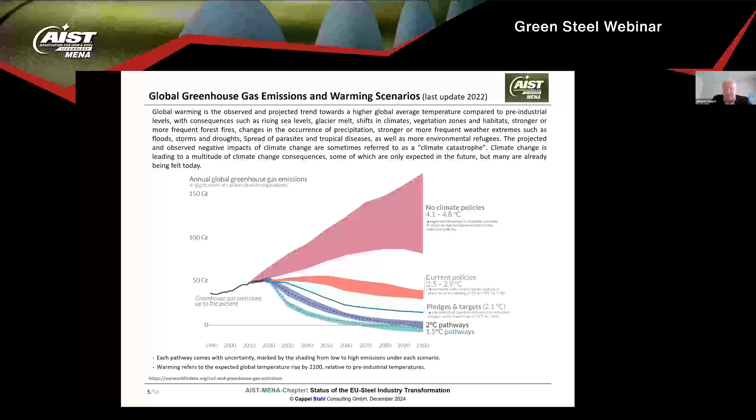We are facing... Jürgen, can you switch on your camera? It will be better if you are a speaker. No, it's okay, but the problem is I cannot switch on my camera. Can you see me? No, we don't see you. Yeah, but you have stopped, Karim. Try again. I mean, if it's working, if not, then okay, disregard my question. No, I'm sorry. I'm now in the presentation mode. So first, okay, let's go ahead like this. Huh? Okay, now I can. Okay, good. Okay now? Thank you.

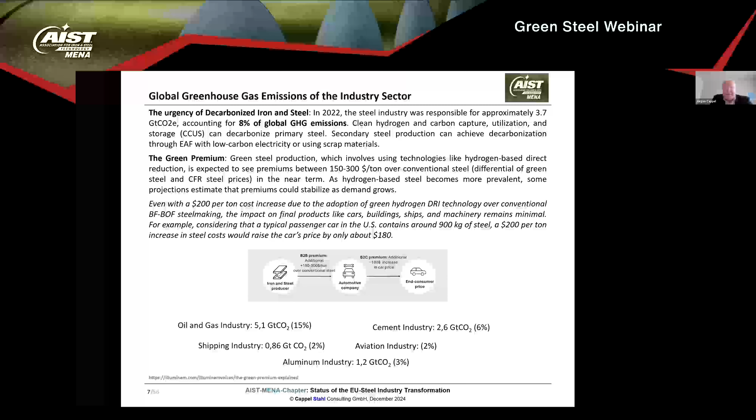Yes, please go ahead. Okay, so most of you know about this situation. If we do nothing, then we will face a global temperature increase of almost 5 degrees. With the current policies implemented, we will face a temperature increase by 3 degrees, but our aim is to reduce it to 1.5, and we have introduced pathways to reach it. If we will reach it, we will see after the timeline has passed.

So why is the steel industry in the focus? The steel industry is in the focus because it contributes roughly 8% to the total CO2 emissions. That seems to be very small, but at the end of the day, the chance here is that a huge amount of emissions can be cut by focusing not on a general measure, but on singular hotspots, which can be transformed for lower carbon emission. Why is the steel industry in the focus? Because the steel industry has the biggest share amongst all the other heavy industries, and that's why they started here.

Okay, let's look into the legislation. The whole topic started with the climate change Conferences of the Parties, or COPs, in 1992, where for the first time the link was made between global warming and the CO2 content in the atmosphere. It lasted until December 1997 to sign the first agreement, called the Kyoto Protocol, to reduce global emissions. And in 2015 in Paris, so after 23 years, we had the first agreement to reduce global warming down to 1.5 degrees centigrade in total.

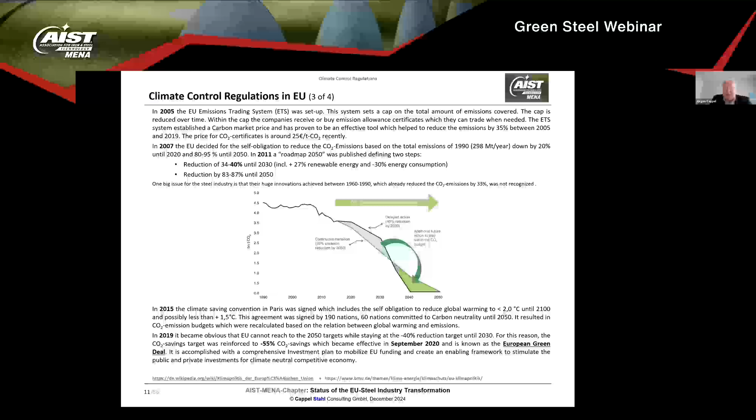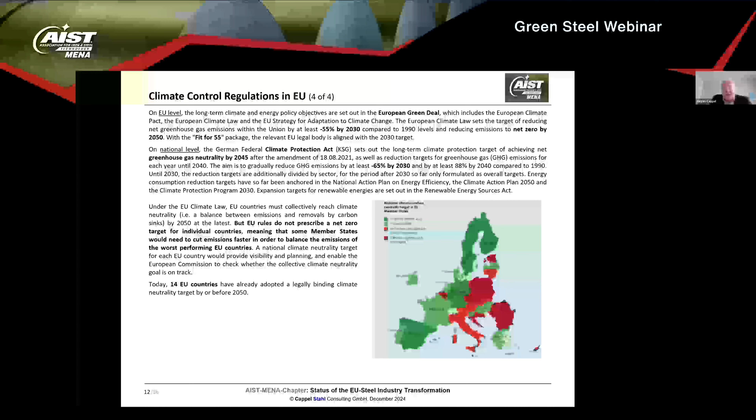Anyway, in Europe, already in 2005, the activities started to reduce emissions in general, and it became EU law in the meantime. And you can see here the path of the reduction. You see the historical reduction shown in the dark curve, and then you see the predictions.

And basically, the conclusion is that the EU has committed to reduce their emissions by 55% until 2030, and to become carbon neutral in 2050. And this EU law was then transferred to the countries. And here in the map, you can see that not all countries so far have contributed, but a lot of countries have converted these EU laws into national laws.

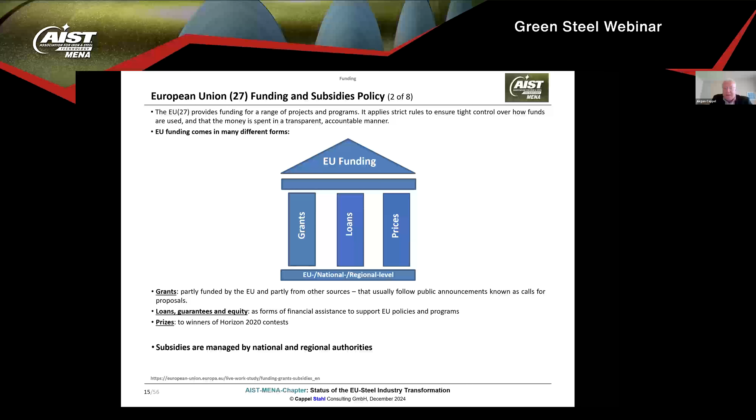And in Germany, the target is now to become carbon neutral even earlier, already in 2045. And the reduction in the first phase should, let's say, already be at minus 65% in 2030. One point has to be mentioned. Carbon neutrality or zero carbon is requested from the EU, but it's not requested from the countries. So this is a big difference. And of course, this is causing some discussion, but we will come back to that later on.

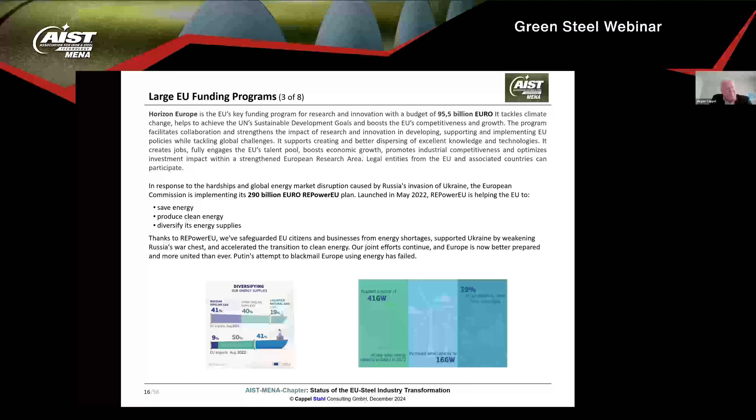Let's look at financing, because all transformations require the implementation of new technologies. New technologies require CapEx, and the CapEx must be financed from somewhere. And the CapEx amount for the first transformation was already estimated by business consultants and other people. And the first round, which will only be, let's say, maximum 40% of the transformation, will already cost 30 billion euros direct investment. So the question was how to raise this money. And this can only be possible by providing funds.

In the European Union, there are several pillars that can provide funds. One is grants, number two is loans, and number three is prizes. And all these different pillars are applied to provide, on the one hand, the CapEx for the technology transformation, but also green infrastructure, because it is not only necessary to implement new technologies to produce green steel, you also need green power, and you also need green hydrogen for the reduction. So all these things are funded with multi-billion euro budgets from the European Union to make things move. And here you can see an overview of the spend in different projects.

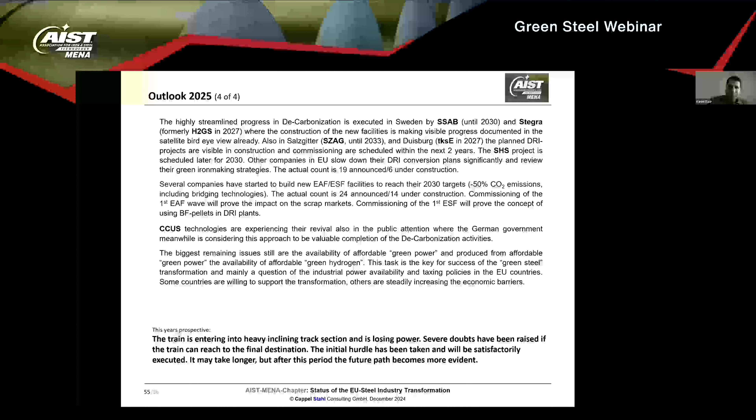And this is all raising doubts, and it seems that this train of the transformation, which started to move, is now running into a heavy inclining section and is losing power. In my opinion, the first round of investments, which are already confirmed, will be done. But what happens with the second round and the full transformation, today we definitely don't know.

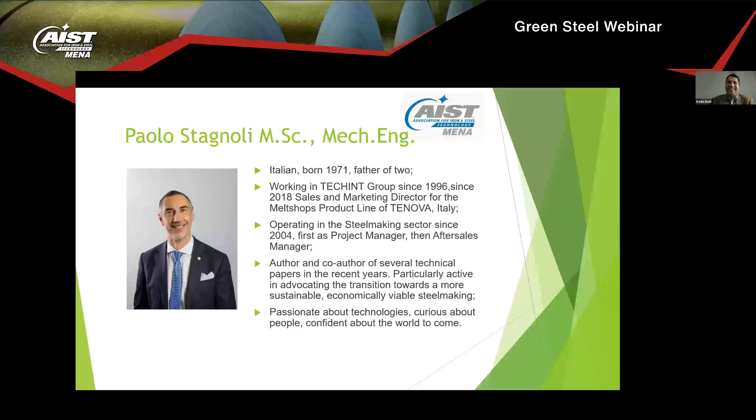We have with us now Paolo Stagnoli. Paolo is Italian by birth. He has been working for Techint Group since 1996, and starting in 2018 he became the sales and marketing director for the melt shops of Tenova. He operated in the steelmaking sector since 2004 as a project manager and after-sales manager. He's an author and co-author of several technical papers, mainly advocating the transition towards more sustainable, economically viable steelmaking. He's passionate about technologies, curious about people, confident about the world to come.

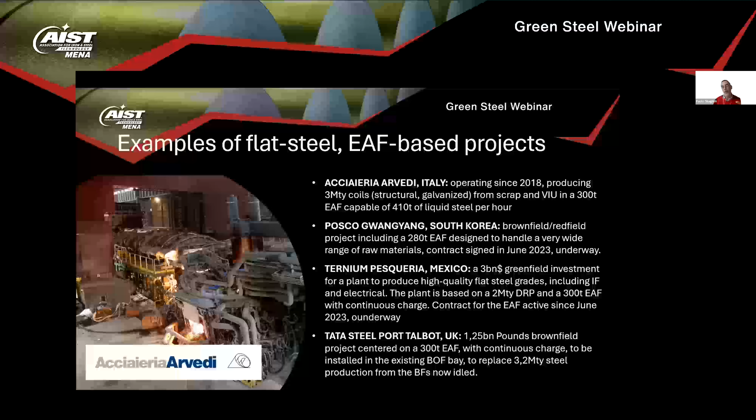I avoided most of the commercial references here, but I can just talk about what I know about, which is: we started demonstrating that electrical furnaces for flat steel were possible with Arvedi. Arvedi is producing comparatively simple grades, but based on that experience, we had several contracts ensuing. The last signed contract is Tata Steel Port Talbot. I can talk about that because it was in all the newspapers.

The trend of very large, very productive furnaces is continuing. We have several other projects ongoing with customers urging us to produce even more productive plants. Arvedi is producing more than 400 tons of liquid steel per hour. In England, provided that everything goes according to plan, we go for 430. And there are other Eastern players which are asking for even more. So the trend is consolidated.

The trend in Europe seems to be based mostly on the obsolescence of the productive assets. When the time for the relining of an old blast furnace comes near, the steelmaker has to take a decision. Most steelmakers facing this decision in Europe are deciding to kill the blast furnace and go for something else. Then the next decision is what to do and to what extent to push the integration upstream, because every producer of high quality steel grades knows that it's impossible to produce high quality steel grades with scrap alone.

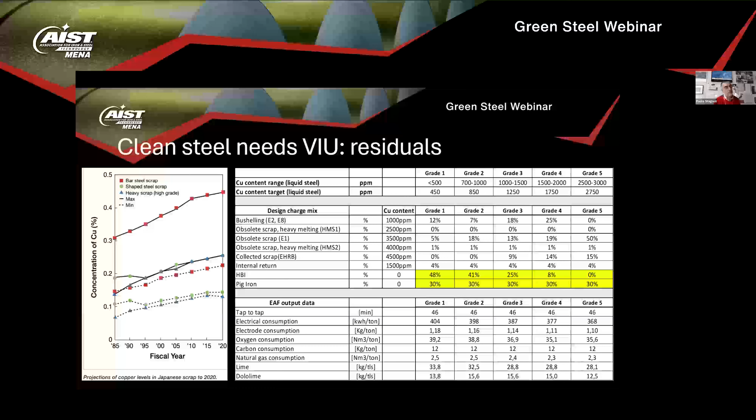So you see that we are studying possible electrolytic processes to remove the copper from the liquid steel. We think that the scalability of those processes, which work just fine on a lab scale, will come 10 years from now. As of now, if you want to produce clean steel: this study on the right was done for an Italian steelmaker willing to produce rails. For some grades, they needed to reduce the copper content to less than 500 ppm.

And you see that the only possibility with the scrap grades available on the Italian market was to use almost 80% virgin iron units. Also our cousins in Ternium, for the Pesquería project, on average will be using 60 to 70% virgin iron units coming from hot DRI to achieve the quality of liquid steel they need to satisfy the requirements of the users. Also Arvedi, even though they don't produce interstitial free nor electric steel, use a significant quantity of HBI and other virgin iron units to close the balance with an acceptable content of copper and tramp elements.

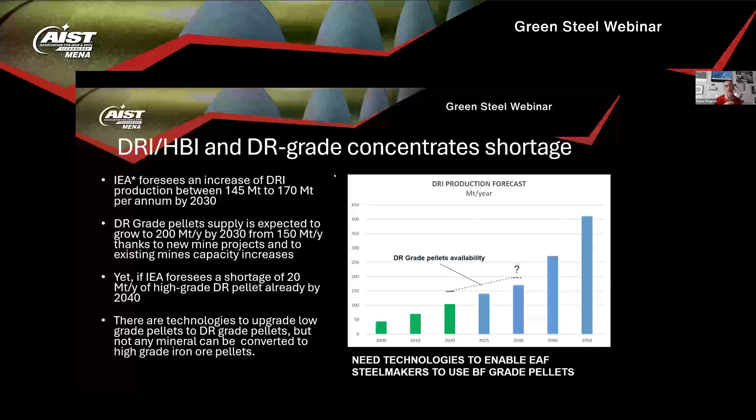But there are several factors pointing to the fact that this is going to be difficult in Europe. First of all, cost of the natural gas: running a plant, waiting for the green hydrogen to come, and hoping to have operating expenditures low enough to stay on the market is now kind of difficult. And there are also other issues, like Europe has no reserves of iron ore except in Sweden, very good reserves. And then there is the topic which was mentioned also by Dr. Kappel, of the availability of high quality iron ore.

Another evidence pointing to some issues with the future supplies of DRI and pre-reduced materials is that the market of DRI nowadays is in the range of 100 million tons, 120 million tons of DRI produced. Most of those tons are produced and consumed within the producing country, but we are trying to compare a market worth some 100, 200 million tons of DRI with the competing market of the blast furnaces, which consumes 1.5 billion tons of raw materials, if not more, 1.7, I would rather say. So many issues are pointing towards a lack of available technologies.

Coming to us, the producers of steelmaking plants, we can get to the quality desired. Several customers already, as I was showing to you, have decided to go for an electric furnace because we managed to convince them that under certain conditions they would have been able to produce the quality of product they want.

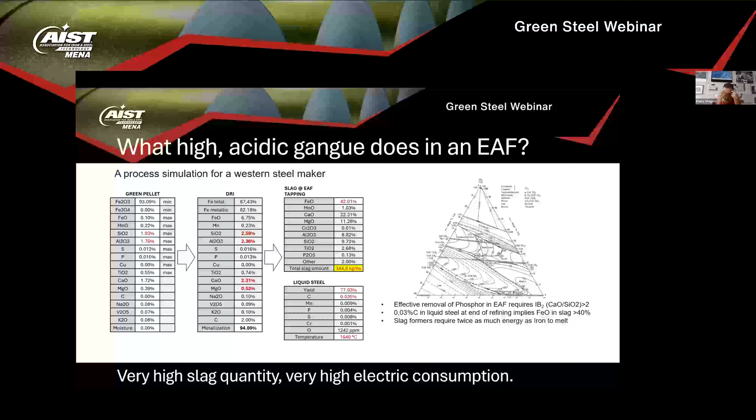And then there is a common misconception that electric furnaces cannot deal with BF grade material. Of course they can. Electric furnaces can melt pretty much everything. The real point is if one thinks to charge 100% blast furnace grade pellets, which have high gangue and acidic gangue at that, into an electric furnace, closing the process in a way like the one depicted in this graph, which points to the production of flat steel. So you see that in the liquid steel, the carbon content is 0.035, and so on. Tapping temperature is also consistent with flat steel production. One ends up with a huge quantity of slag. This is by operating the EAF in the normal way, okay?

So starting from the blast furnace grade pellet, injecting oxygen to remove the excess carbon and to remove the phosphorus, adding to the process lime and dololime enough to protect the bricks and to achieve a basicity index of the slag sufficient for phosphorus removal, one ends up easily with a quantity of slag which exceeds by far 300 kilo per ton, even 350.

And since an electric furnace is working to produce such a low carbon product, 40% more or less of the slag, due to the chemical equilibrium in the reaction and to the kinetics of reaction, is iron oxide. One ends up losing to the slag a terrific portion of the iron which has been put into the furnace, in turn producing a kind of slag which, unfortunately, by containing 40% iron oxide is nothing but waste.

So one of the material issues is that the blast furnace-based plants operating nowadays look at the slag as a source of revenues, because the slag produced by blast furnaces is interesting as a raw material for the cement industry. Remember that the cement industry is one of the largest sources of scope 1 emissions.

When they burn, when they calcinate calcium carbonate to produce lime and to go on and produce clinker and the rest which is needed to produce the cement, they release vast amounts of CO2. So being able to sell to the cement industry a product which can replace some other chemicals which come with a high CO2 bill is very interesting.

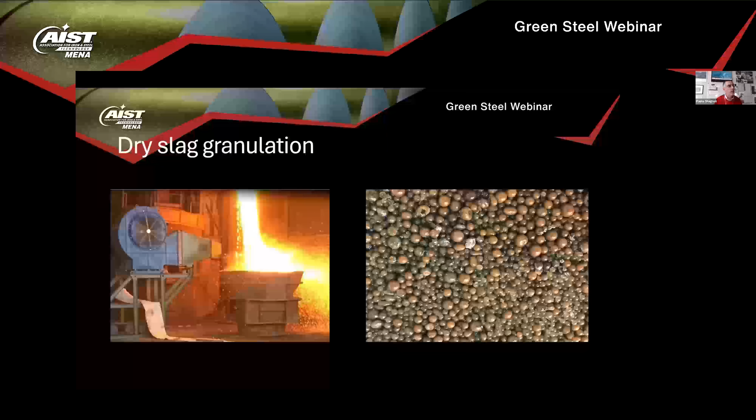So besides the issue of finding ways to produce steel from subpar quality materials, there is also the issue of producing a slag which is marketable. We have already developed, for several customers, specific processes on how to deal with blast furnace grade materials and producing blast furnace-like slag, which can be turned afterwards into clinker, for instance. This is an example. You can have a look at the inputs and at the outputs of the process.

This kind of process requires a specific design of the electrical furnace and a specific design of the refractories too, and I hope I will have the chance to discuss this with our RHI colleagues soon. The slag can be treated. We already have examples in the world of a dry slag granulation that turns the slag into a vitreous compound that has several advantages, including the fact that it does not release leachates, it is very stable and can be sold as a product to the cement industry.

To summarize it all, I saw you, Karim. This is the 30 seconds.

Transformation is now being redirected in a way. The European steelmakers seem now more willing to consider the installation of electrical furnaces alone, under the assumption that you can produce good quality steel from the electrical furnace. But this brings in the necessity to find sources of virgin iron units coming from somewhere else, a trend already being considered by several players who have announced very large projects of production of DRI and HBI in the Middle East, in Libya, in Oman. There are several projects ongoing, which will in turn open the possibility to split the value chain in different ways.

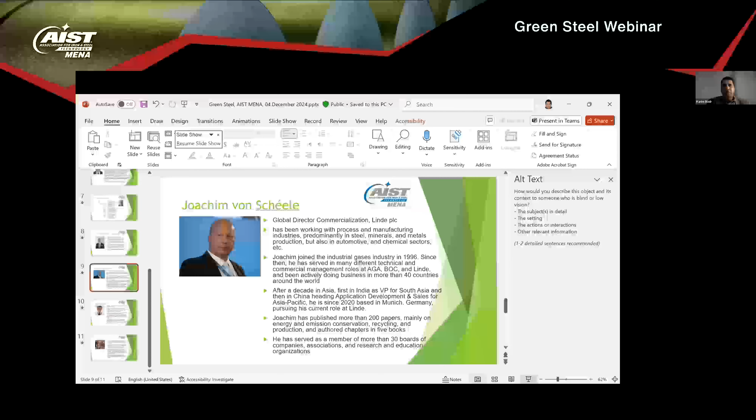And on the other hand, it could be difficult to begin producing high quality steel and certifying it if one has to wait 3 years before he can sell the good quality stuff to car makers or to the electric steel makers, which is why this kind of project, splitting the value chain at the point of the virgin iron units, are popping up quite consistently both in Europe, where many are thinking about the electric furnace and secondary metallurgy alone, and in the Middle East, where many are thinking about exports of HBI or similar products.

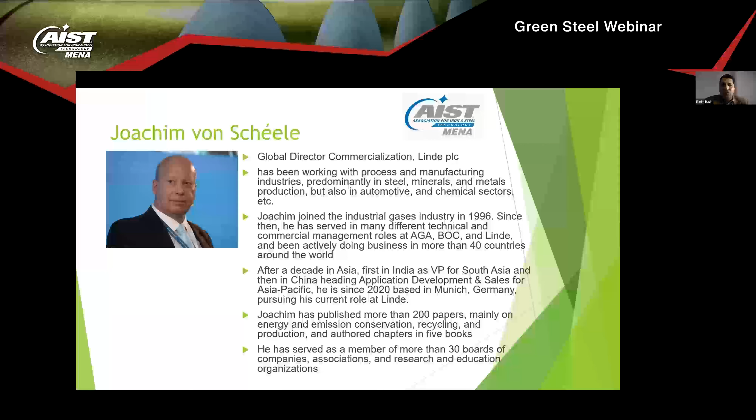Now we are switching to Joachim von Schéele. Very happy to have Joachim with us today in this webinar. Joachim has also a very rich CV, if we can go briefly through it. He's a global director at Linde. He has been working with process and manufacturing industries in steel, minerals, and metal production, but also in automotive and chemical sectors. Joachim joined the industrial gases industry in 1996.

Since then, he has served in many different technical and commercial management roles at AGA, BOC, and Linde, and has been actively doing business in more than 40 countries around the world. After a decade in Asia, first in India as vice president of South Asia, and then in China, heading application development for Asia Pacific, he is since 2020 based in Munich, Germany, pursuing his career at Linde.

Joachim has published more than 200 papers, mainly in energy and emission conservation, recycling, production, and he authored chapters in 5 books. He has served as a member of more than 30 boards of companies, associations, and research and education organizations. Thank you once again, Joachim, for being with us today. Please start your part.

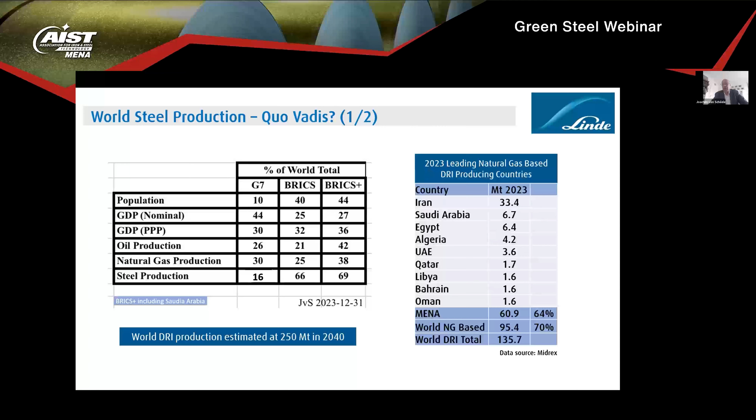Now, let's look at what is happening in the world and zoom in a bit. Where is world steel production today and where is it going? I was contemplating at the turn of the year the formation of what we can call BRICS Plus. What is the size of BRICS from different perspectives compared to G7? If we look at the last line in the table to the left, you see that the G7 countries produce about 16% of the steel in the world, while BRICS Plus produce about 2/3. 2 out of 3 tons in the world is produced in the BRICS countries.

And if we then look at DRI production, which is coming very much into focus when we talk about green steel, and of course we talk about natural gas-based production, not so much the coal-based production, which is predominantly taking place in India, we can see the enormously important role that the MENA countries have in this context. They're absolutely dominating in the world. And that creates a fantastic basis for developing this further.

We can see estimates that in the next 15 years, there will be roughly a doubling of DRI production in the world. And I would assume that the vast majority of this doubling of DRI production is not taking place in Europe, but maybe more in the MENA countries and some other places in the world.

And if we assume now, and I think many could agree to that, we will see an average growth of the steel production in the world over the next, say, 15 years, so about 1% or so. This is not very much to be taking place in Europe or so. I think we can neglect Europe very much in this context.

The biggest growth is happening in India. Yeah, and basically, if you see a growth of, say, 300 million tons a year, about half of that is taking place in India. But looking at the MENA region, I think we are forecasting roughly a doubling. So that is very, very good news. And I think that has its reasons also when we talk about the green steel.

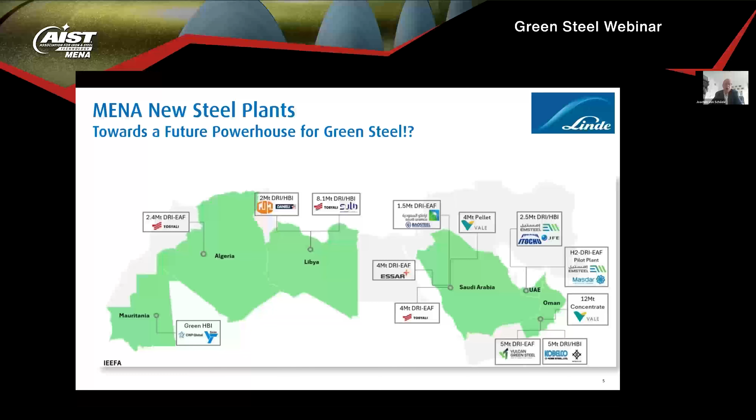One thing that we always should remember when we talk about green steel is the availability of scrap. And I think we can see that the world's largest producer of steel, China, with more than half of the world production, will have quite a reduction of its CO2 emissions. And part of that is due to the higher scrap input that will be there. But there will also be a little bit less production in China, as we've already seen. And of course, a number of good things when it comes to technology is also being implemented there.

MENA, we have seen pictures like this. This is taken from IEEFA. Examples of new plants that are coming up in Northern Africa or around in the GCC countries. And this is just one example of such a summary. There are many others, and there are also people here today that will talk about these new plants.

So I think that we see a lot is happening because there are very good preconditions for making steel, and not least to make green steel in the region. And I dare to say that we are looking forward to having the MENA region as a future powerhouse for green steel production.

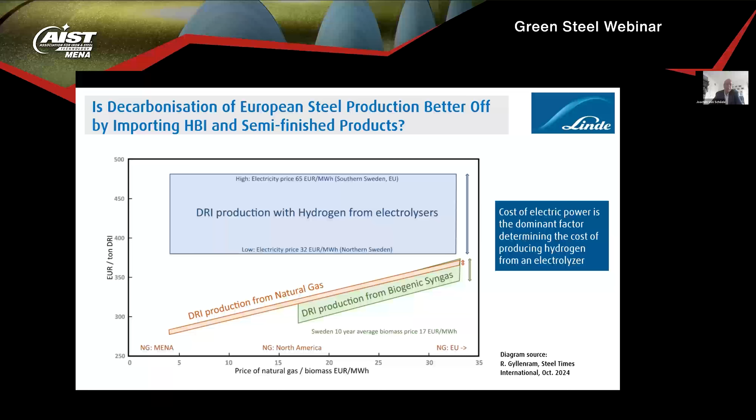Taking that in the perspective of Europe for a second, and it was talked about Europe a bit in the previous 2 presentations. I borrowed this diagram from my friend Rutger, who published this in Steel Times in October. And you can see, if we consider hydrogen to be a key for green steel production based on DRI, the importance here of the cost of electricity and how that impacts potential production of DRI using hydrogen in Europe. It's quite high compared to if we produce it elsewhere and using natural gas in the MENA region, for example, as mentioned here in the diagram. So DRI production from natural gas is way more competitive than DRI production from hydrogen in Europe.

And that can open up for different scenarios, of course. We should keep in mind here, as I noted, that a large part of the cost to produce hydrogen is the cost of electricity. It's more than half of the cost. So when we look at different vehicles for steel production decarbonization, I think we should take a bottom-up approach and start by looking first at energy efficiency. What can we do to use less energy in the production? And oxy-fuel combustion, and particularly with hydrogen, is a good thing there.

Second thing is to look at other alternative fuels. So now I'm looking at fuels here mainly. And then we have two things that are more connected to the reduction part in general. One is the CO2 capture, and the other one is hydrogen, and hydrogen then for the reduction. We should keep in mind hydrogen can be used both as a fuel in the steel industry and for reduction.

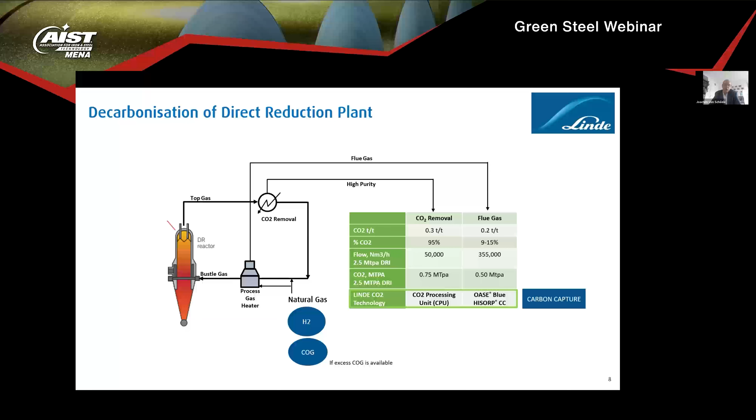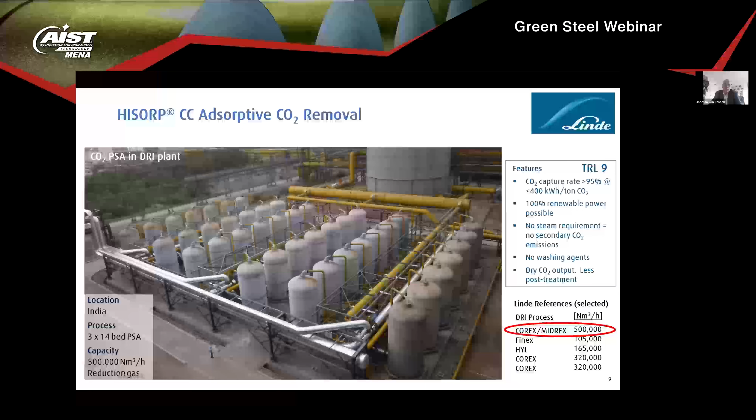Many people are not considering maybe enough the possibilities to have decarbonization of direct reduction from natural gas-based production using carbon capture. We think that that is something that we will potentially see much more of going forward. Of course, we can use hydrogen there, as many people discussed in previous presentations, but there is also the opportunity to capture CO2 coming out from the DRI production, and that is already done actually. So there is a removal of CO2 from the process, and that can be done with a very high degree of efficiency.

And I think that particularly in the MENA region, this could be a very interesting solution to do carbon capture from existing and new plants that are using natural gas as a reductant, and potentially then phasing in use of hydrogen.

This is not new technologies at all. If you look across the world, carbon capture today is about 45 million tons of CO2, and a number of installations have been operating for quite a long time in the steel industry. Here's an example of so-called HISORP technology, which in this example is installed at the Corex plant in India, and the reduction gas volume there is 500,000 cubic meters per hour, and about 95% of the CO2 coming in that stream is actually captured.

When we look at hydrogen in this context, I think we again should be very agnostic about how this is done. I know that our friends in Brussels have had a little bit rigid approach to it and talk about only electrolyzers, but to be successful, I think we should be more agnostic. It's important that we consider all alternatives, and as long as we are reducing carbon footprint and making greener steel, I think that we can embrace all of them.

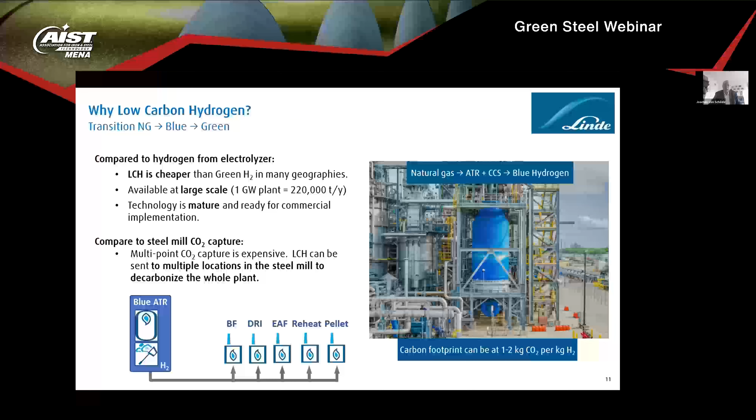An alternative to that is to use SMR or ATR technology, where you feed in natural gas and capture the CO2 that is produced in the production of the hydrogen. And this has developed a lot over the last few years, and we see that many times as a good solution at very large scale. So that is an opportunity, and it's important that we think about what is the best way to scale this up, and it could also be in a transition, of course.

If we compare low carbon hydrogen production with different technologies, we can see that with natural gas based production and carbon capture, we today have plants at large scale, more than 200,000 tons per year. We at Linde, for example, are investing in a new plant of that size in Canada now. That is the equivalent of 1 gigawatt electrolysis, which is of course much bigger than what is in operation today. So this could be a very good way to supply hydrogen. And that hydrogen actually could have a very low carbon footprint. We talk about 1 to 2 kilograms of CO2 per kilogram of hydrogen.

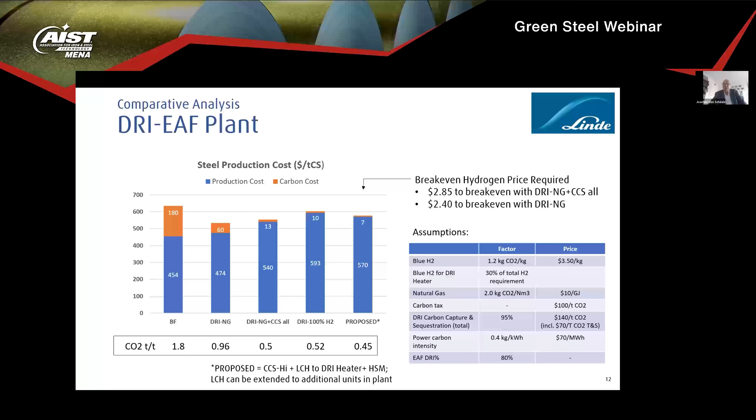If we compare that solution to having carbon capture from multiple points in a steel plant, I think this is a much more efficient way of doing it, using hydrogen as a reductant and fuel in the steel plant instead. We have looked at this. I will not go into details of all the different numbers here, but I think we can see that from a cost perspective, for DRI production coupled with EAF plants, it looks quite attractive to use this type of supply solution for hydrogen. So I think that is something that should be more discussed.

As many people always emphasize, it's about various solutions. It's a toolbox and a combination, and we have to be open and evaluate different ways to reach the ultimate target of producing green steel. And I see this fitting quite well in Northern Africa and GCC countries, etc., in West Asia, where there are also quite good possibilities for storage of CO2.

Another thing is the low carbon fuels of different kinds, which we see coming up at many places, and that is then used for generation of a syngas that can be used in a blast furnace or in a DR shaft as well. That could be based on gasification of solids, liquids, and gases. There are various technologies. Here's one example, the so-called hot oxygen technology. This has been tested in various scales, also for DRI production together with Midrex.

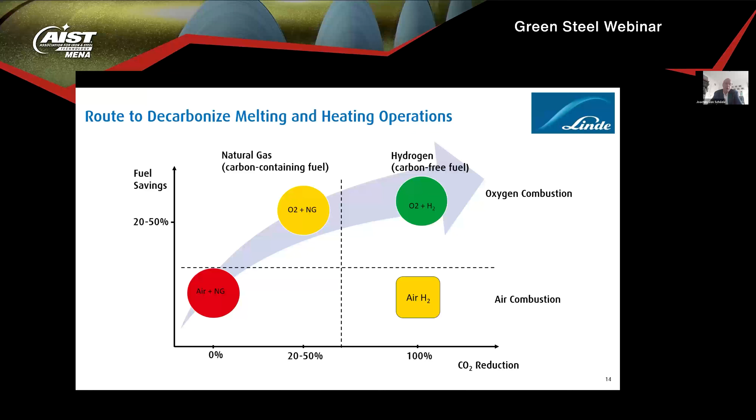Now, looking at the melting and heating operations, we are back with the energy efficiency very much here. So if we can go from a conventional, traditional combustion with fossil fuel and air to an oxy-fuel combustion, there are good possibilities to have big fuel savings and thereby also reduction of the CO2 emissions. If we do that conversion in such a way that we implement technology that is hydrogen ready, then we can of course replace the fossil fuel later on with hydrogen, partly or fully.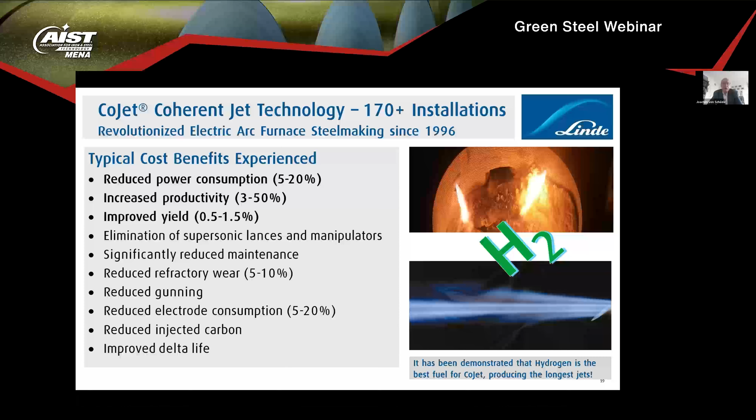And we can take a step where we maybe reduce the fuel consumption and the carbon footprint by say 30% in the first step by doing these kind of things. And this has been going on for quite a couple of decades now, the first part of this, with hundreds of installations across the steel industry in various processes.

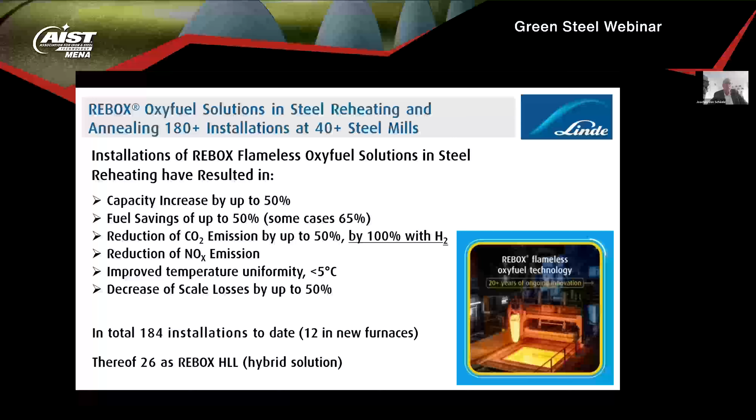Traditionally, of course, oxy-fuel combustion came into the electric arc furnace to support the melting, and the CoJet technology has been there since 1996. What is interesting is that there have been the first operations and tests using hydrogen for the flame shrouding for the oxygen injection of the CoJet injector, and that has worked out very, very well. It even gives a better operation than with the other types of fuels. So that works, and it even provides additional benefits, I would say, with the longer injection jets.

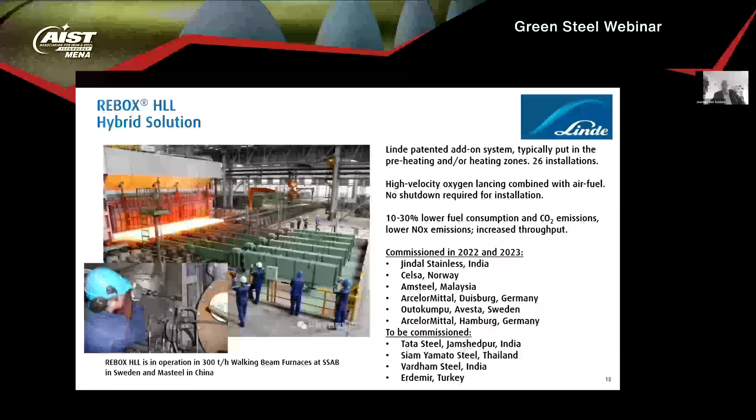When we look at combustion, we should distinguish between the conventional oxy-fuel like used in an electric arc furnace and the flameless oxy-fuel types, which are used for heating and reheating, where instead of a very hot and sharp, bright flame, we have a flame cloud with a very uniform temperature heating ladles or heating slabs or billets. So this has been implemented now for about 2 decades in various installations with very, very good results. We have been working a lot with this ourselves, as you can see examples of here.

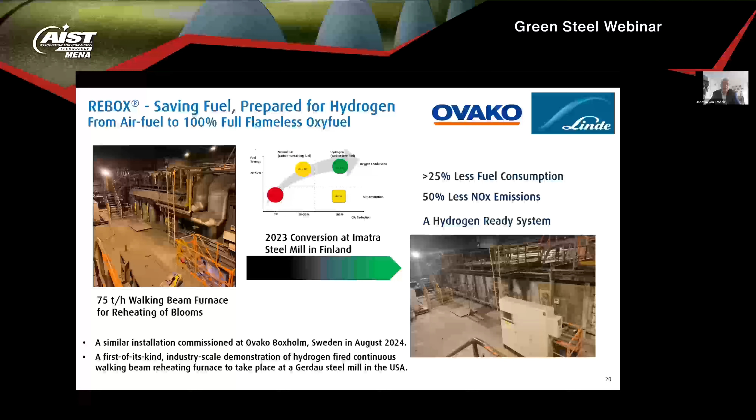And also in hybrid solutions, where it's a combination of air-fuel and oxy-fuel, and this has become very popular over the past few years. And we see that a lot of the new installations here are actually happening in Asia. You see examples of what is to be commissioned with this technology here in India, in Thailand, and in Turkey.

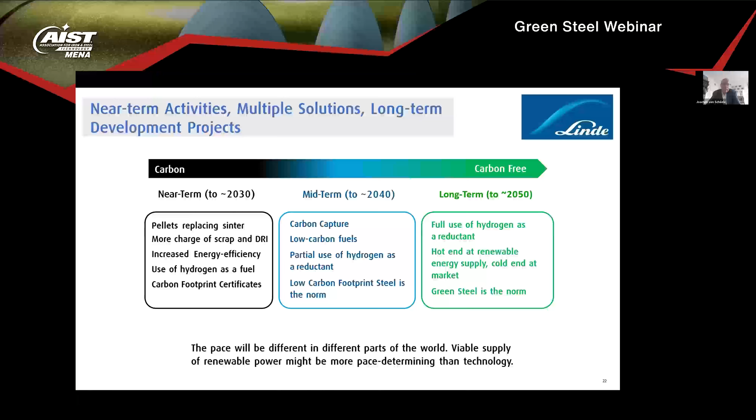There are also examples of heating using only hydrogen, 100% oxygen with 100% hydrogen. The first example of this was already 5 years back at Ovako Steel, and that has been in full-scale operation since, let me see, 9 months ago. So this is in operation. This is not futuristic. This is today, 100% hydrogen for steel reheating. And we see a lot of things going on following that diagram that I showed earlier.

And here is an example from Finland 2 years ago, converting a 75-ton walking beam furnace first into flameless oxy-fuel and then making it hydrogen ready. Similar stuff is going on at other plants like Ovako Boxholm and in the US. Ladle preheating, I already mentioned, very good opportunities to reduce the fuel consumption there as well. So I see in general that we are moving into near-term solutions that are more improvements of current processes before we go into the mid and long-term things coming in the next decade.

Trying to summarize a bit, it's very much about emphasizing energy efficiency. It's about remembering the possibilities for carbon capture, both from the processes and when producing hydrogen. Many people already pointed out, also in the discussions here, the importance of the electric power supply. If you build a new plant, it might cost much more to secure the electric power than the plant itself. Particularly, Paolo talked about the different grades of iron ore and the limitations that could have. So it's the same thing. It's important to pay attention to scrap here.

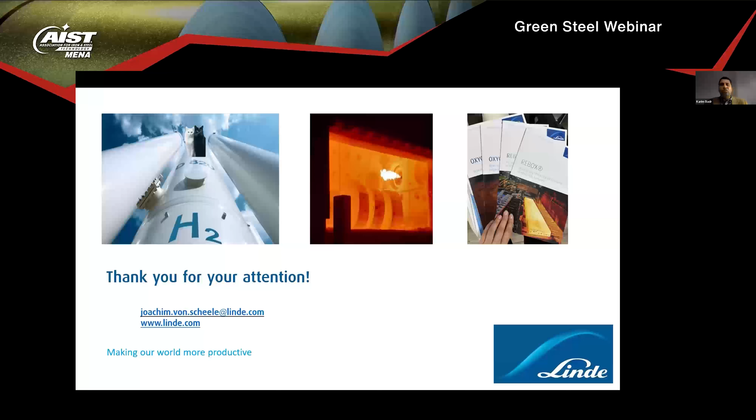I think that when we look at the supply of hydrogen, what is stopping us today more than the technology as such, it is about the scale of the supply, it is about the possibility for carbon capture, and it is about the availability of electricity supply, particularly then, of course, renewable power. And keeping that in mind, again, we see very good possibilities for the MENA region, for sure.

And let me emphasize that hydrogen is very tricky to transport. So hydrogen should be produced where it is to be used. If you want to transport something, why don't you transport the HBI? Or why don't you transport semi-finished products instead of trying to produce hydrogen? I think that this altogether creates the possibilities for the MENA region to be a true powerhouse for green steel

production going forward. Thank you very much for your attention.

Thank you very much, Joachim, for a very interesting presentation, as usual. It gives good insights about the gas industry and how you are always trying to be up to the maturity level of the steel industry. Well, I totally agree with you that the thinking in Europe should also change, talking about proper ways to transport green hydrogen from the Middle East to Europe by pipes or through methanol or through ammonia. Isn't it another mature option to produce the HBIs, DRIs, the green ones, and use them as a green hydrogen carrier? And let's continue the value chain downwards in Europe.

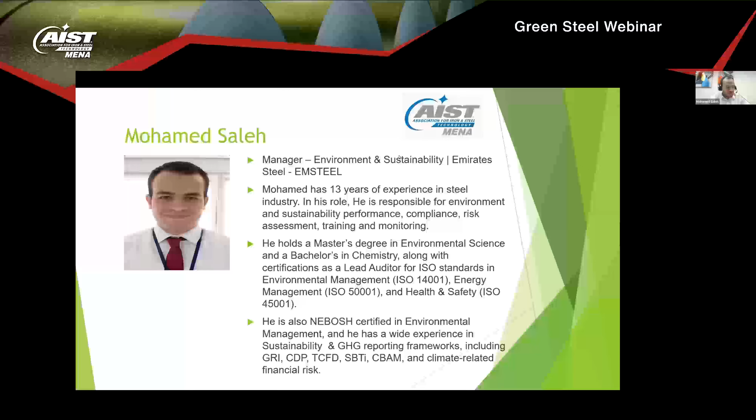I hope so. So now we have Mohamed Saleh. We are very happy to have him for the first time with us in the chapter. Mohamed Saleh is a young engineer, now a manager at Emirates Steel in the field of environment and sustainability. Mohamed has 13 years of experience in the steel industry. In his role, he is responsible for environment and sustainability performance, compliance, risk assessment, training, and monitoring.

He holds a master's degree in environmental science and a bachelor's in chemistry, along with certifications as lead auditor for ISO standards in environment management, energy management, and health and safety management. He is also NEBOSH certified in environmental management, and he has wide experience in sustainability, GHG, and reporting frameworks, including many other certificates. We are happy to have you, Mohamed, with us today. Please share with us some insights about the great steel plant, Emirates Steel.

Thank you, Dr. Karim, for this introduction. I really appreciate your invitation, and thanks all for allowing me this opportunity to discuss with you today Emirates Steel's green steel journey. Over the next 18 minutes, I will try to be a little bit optimistic, unlike my other colleague, but I would like to present what we have done so far in terms of decarbonization efforts in Emirates Steel.

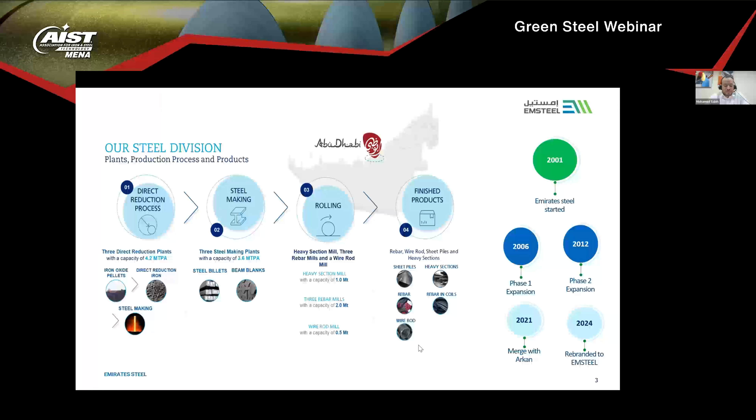First, I would like to give a small introduction about Emirates Steel, or EMSTEEL. EMSTEEL is the group company of two business production streams, Emirates Steel and Emirates Cement. We are a group of 4 companies, actually: Emirates Steel, Steel Business Unit, Emirates Cement, Blocks, and Anabib. Our total production of steel is 3.5 million tons of long products, rebar, wire rod, rebar in coils, and also heavy sections and sheet piles. And we also produce 4.6 million tons of cement annually.

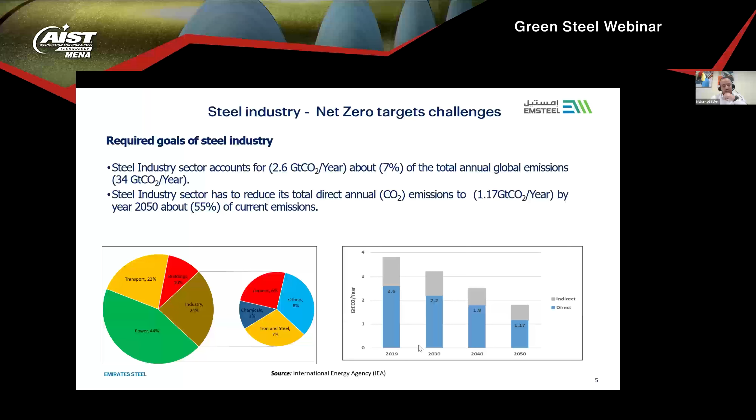We are an integrated steel plant. We are natural gas-based DRI. We have 3 modules of the Danieli, HYL, DRI production units with production capacity 4.2 million tons, and we have 2 steel making plants with 3.6 million tons capacity, along with 5 rolling mills with total production capacity 3.5.

And before we delve into the details, I would like to emphasize the challenges that my colleague presented. In Emirates Steel, we have a very ambitious target and journey to decarbonize our facilities. I will not give more details because Dr. Jürgen already presented the challenge in terms of the required carbon emission target for the steel industry to be cut by 55% by 2050.

As my colleagues mentioned, the maturity of the technology is so far not mature enough to scale up or to be sufficient to decarbonize the current steel industry emissions. But I want to emphasize also the current risks, internal, local and external, which is CBAM. So in terms of UAE regulation, we have 2 very important programs so far. The first is the first NDC by the UAE government.

It's the national target. The initial target set in 2019 was for the steel industry to cut their emissions by 5%. But after publishing the second NDC in the previous COP here in UAE, this target is stretched to 13% by 2030, and also there is an aggressive reduction target post 2030: 33% by 2035 and 64% by 2040.

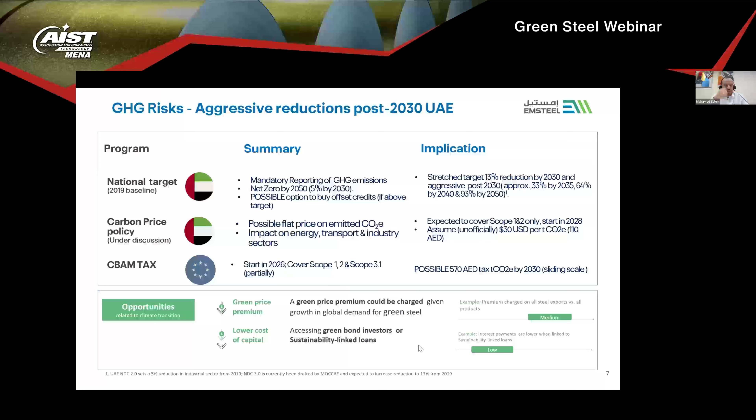And also a carbon pricing mechanism is now under discussion, and it's possible to be mandated soon. It will for sure be a mirror of the CBAM regulation. It will be implemented here in UAE, probably in the energy sector, transport, and industry sector. We are expecting almost $30 per ton CO2 will be imposed on steel products. So this is also another risk we have here in UAE.

But actually, Emirates Steel sees this as an opportunity. We see this risk could be turned into opportunity if we have a chance to have a green price premium if we are beyond this target, and also it is possible to access some green bonds or green investment to support our decarbonization journey.

In general, our decarbonization strategy has been built on 5 pillars. We have a commitment to reduce our CO2 emissions by 40% by 2030. Even though the UAE government is asking for 5 or 13% maximum by 2030, we have a very ambitious target. We set 40% by 2030, and also to achieve net zero by 2050. So our strategy focuses on 5 pillars, as I mentioned.

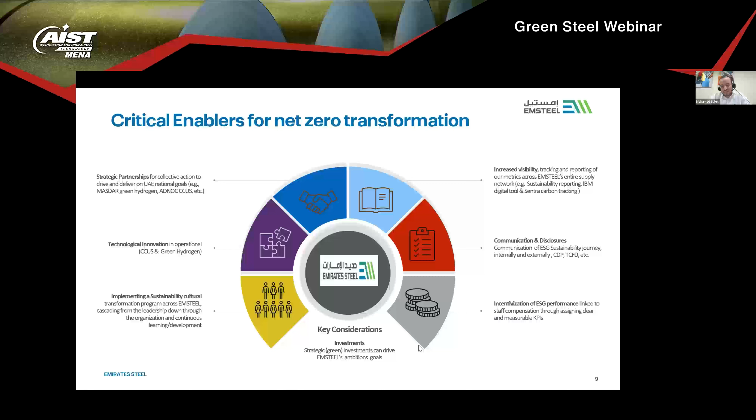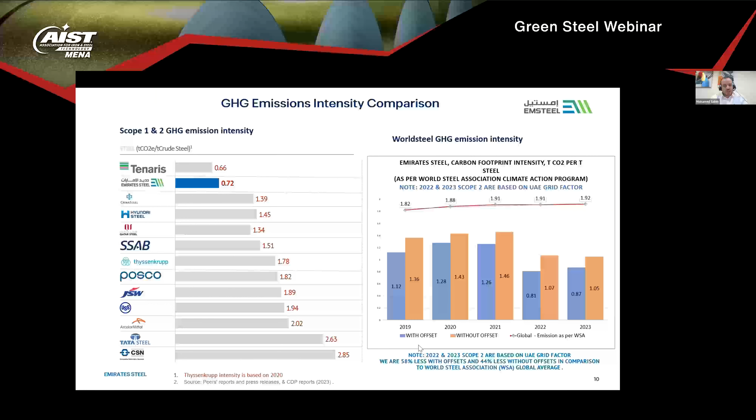We also have a good strategy in terms of transformation. Emirates Steel management leadership is keen to implement this transformation starting from ground level up to the higher level. And also we are going to enhance our tracking and modeling of CO2 data. This is very important to track our emissions not only on a yearly basis. We now have a digital system to calculate our CO2 emissions per heat level, per product level. So this is an online system.

So we are able to monitor, compare and do internal benchmarking of our performance to make sure that we align our effort with the decarbonization strategy. We are also disclosing our strategy. You can find all the details and information in the CDP report and TCFD report, and also in the sustainability report published on our website.

In terms of the emission performance, as you may see here in this slide, we consider ourselves a benchmark for the industry, one of the benchmark steel makers in the steel industry. Our scope 1 and scope 2 emission is 0.72, which is a great number compared to our competitors. And we are aiming to cut this emission since the implementation of the strategy in 2019. This is the performance. So our emission is declining on a yearly basis.

So far we have achieved 28% in terms of the decarbonization targets, and we aim to cut the total emission by 40% by 2030. Also, this year we have a very interesting milestone in terms of decarbonization. Emirates Steel has inaugurated the green hydrogen facility in our plant. And the purpose of this project is to test the hydrogen in our existing facility, HYL.

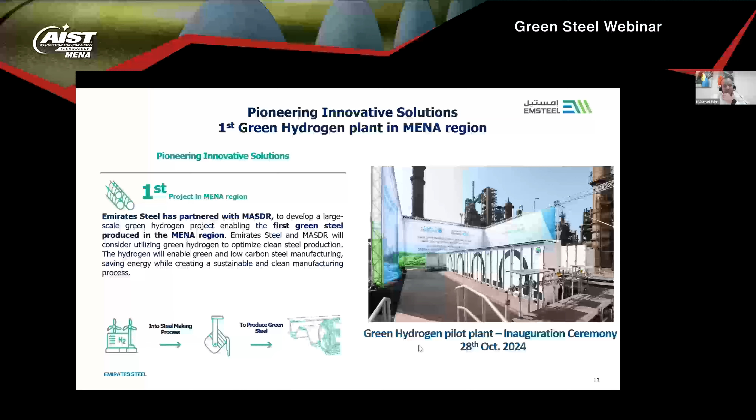However, as my colleague mentioned, the scaling of this green hydrogen comes with many challenges. The first challenge is the transportation and also the scale up of the hydrogen plant to feed our existing module. We have the capacity of 4.2 million tons DRI production in our facilities. So the scale up of this comes with a lot of challenges, but another challenge here is the availability of green electricity.

Also, there is a challenge here in UAE because of the power purchase agreement. This kind of mechanism is not allowed here in UAE, but currently there is a lot of discussion and the regulation might be changed in the near future. In addition to that, Emirates Steel is working closely with Masdar, our partner, to explore the opportunity to scale up this project up to 100 megawatt.

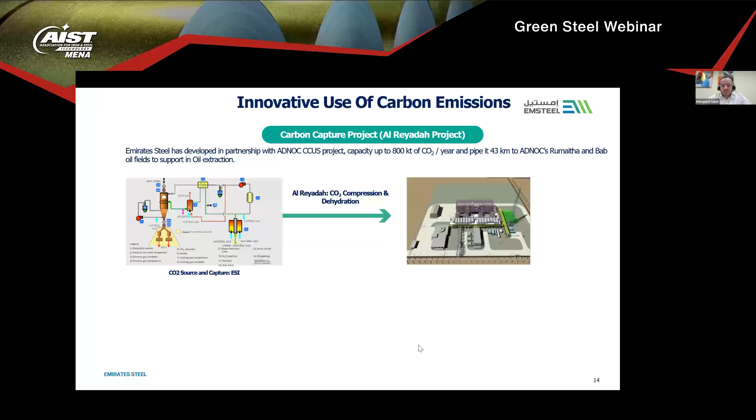And the initial plan for this project is to be started in 2028. So we see this as a very critical step forward to test the hydrogen in our facility. This is the first green hydrogen in a plant in the MENA region.

Also in our facility, since 2016, we have adopted the carbon capture project. Our capturing capacity is up to 800,000 tons of CO2. The basic idea of this: our flue gas is enriched with almost 8% of CO2. So we pass these gases into a separator and we pump these CO2 gases into Al Reyadah. This is the adjacent facility.

The purpose of this facility is to increase the pressure of CO2 and also dehydrate the CO2 and remove the moisture from the gas. And then this CCUS facility is pumping the CO2 enriched gas into an oil field, which is located 43 kilometers away from the Emirates Steel facility. And using this technology, ADNOC, our partner, is able to increase the pressure in the well and pump out the oil to increase the productivity of the well.

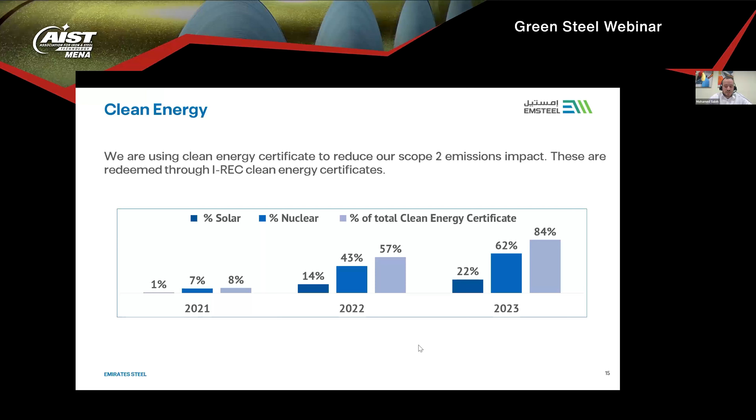In terms of clean energy, we are using clean energy certificates to reduce the scope 2 emissions. So last year we utilized almost 84% of clean electricity certificates. The majority of these certificates is nuclear, 62%, and solar energy is around 22%. By the way, this amount is equivalent to 2 million megawatt hours of our electricity, which is 84% of the total electricity used here in the Emirates Steel facility.

And we have an ambitious target to adopt 100% clean electricity sources by 2030. And we are now in discussion to invest in a PPA project to have a solar power plant dedicated for our facility. This is currently under discussion with the government, and soon we will see where this discussion will lead.

In terms of scope 1, we have, as I mentioned, carbon capture, and also we have an energy reduction plan, and for scope 2, we have the clean electricity. There is also one aspect that needs to be addressed in our decarbonization strategy, which is scope 3. Scope 3 represents almost 40% of our total CO2 emissions. So we are giving this high importance as well, like scope 1 and scope 2 emissions.

So this year we have a good partnership and strategic approach with one of our partners, which is called H-Carbon. This strategic partnership gives us the opportunity to access and communicate with our suppliers to get the available CO2 data, and there is also active discussion with our suppliers reviewing their decarbonization efforts. We are also offering comprehensive training to our suppliers about CO2 emissions, taxes, and all of these aspects, collaborating with our suppliers to reach a good position in terms of reducing overall scope 3 emissions.

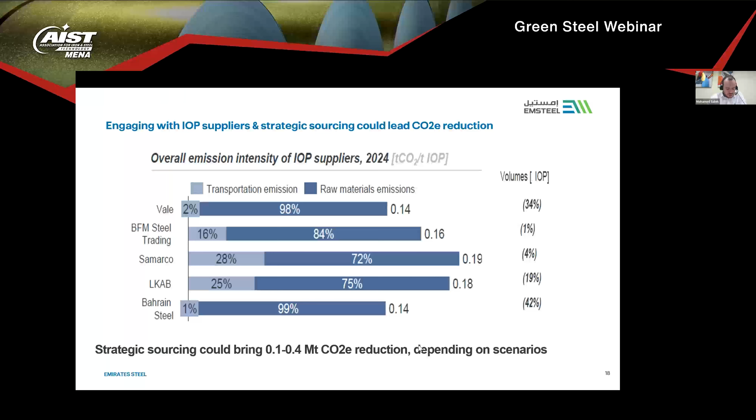Also, given the current and future challenge for the availability of high quality IOP, especially as current projects in Europe and all over the world operating DRI plants start up, there will be more pressure and challenge in supplying high quality IOP. So our management took a very proactive step, and currently there is an active discussion with Japanese and Asian partners to build a joint venture project here in the UAE. This project will be a complex to produce high quality IOP, HBI, and DRI.

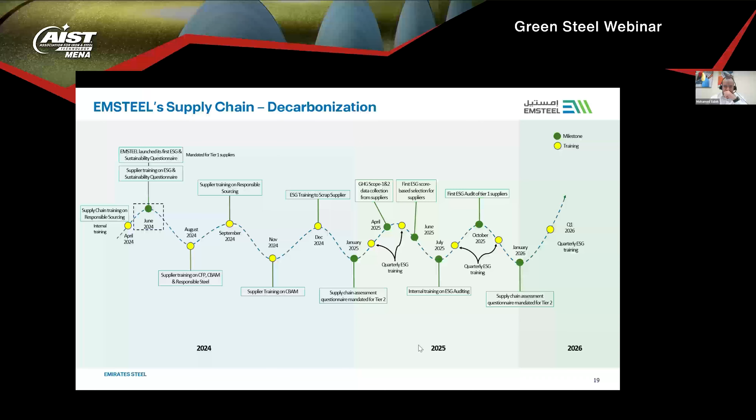With this project, we aim to secure our future supply of high quality iron ore material. I cannot disclose too much information at the moment, but this project will be announced soon, maybe in the first half of 2025, and it is expected to be in operation by 2028. So this is also our decarbonization plan in terms of the supply chain. We have a good strategy in terms of decarbonizing our scope 3.

This comprehensive plan contains training for our suppliers and also evaluation of our suppliers based on their ESG and sustainability performance. This is the ESG performance assessment that we implemented this year for suppliers. We will classify our suppliers based on the score they collect from the questionnaire into 3 categories: low, medium, and high risk. Suppliers with high risk will be given a 2-year plan for improving their score, and their CO2 emission performance will be part of this.

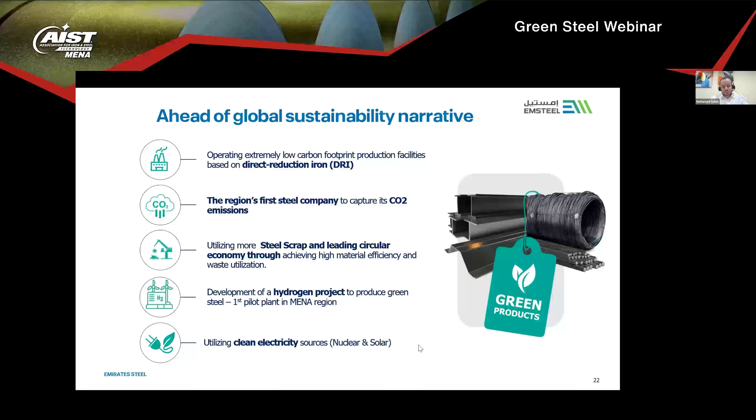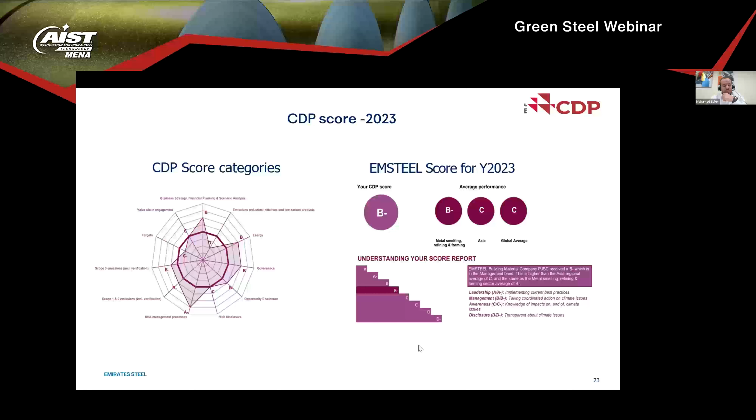To wrap up and conclude my presentation, I would say we are proudly ahead of schedule on the decarbonization plan. So far, we have achieved almost 30% reduction. Thanks to the current technology that we already have, and we are lucky to have natural gas available in our area, we are operating extremely low carbon emission DRI facilities. We are also the first steel company that captures CO2 in our facility. We have started to test and develop a hydrogen project in our facility, and we have almost 84% clean electricity sourced to decarbonize our scope 2.

By the way, I want to share with you our CDP score, so you can also get the full details of our decarbonization plan and targets in the CDP report. This is the first CDP report that we submitted, and our current score is B-, which is above the average Asian company and the global average of the steel industry. We are targeting to increase our score to the A band this year, so we will get the results soon in January. So this is our decarbonization performance evaluation.

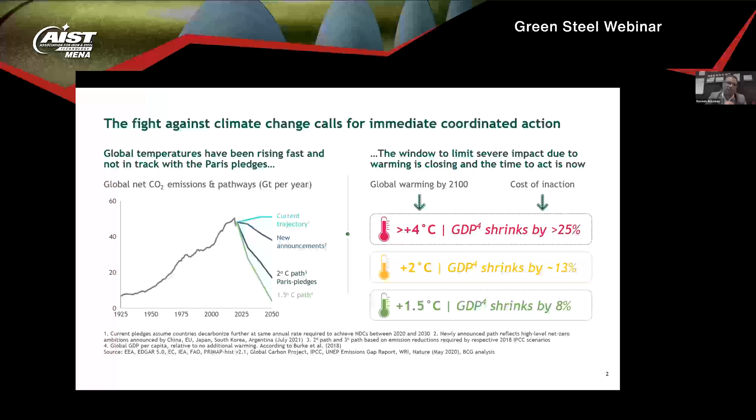I think this is an introductory slide and very important to understand. The right hand side is slightly more important in terms of understanding the impact of inaction. There is a sort of inertia among all of us, and we believe, let someone else do it, let them be the guinea pig, the first mover, and then we'll come in and de-risk the overall value chain. And that is where the cost of inaction is.

If we just go with the current trajectory, we have to go for a rapid or accelerated deployment of carbon capture and decarbonization to reach the goal. As per the recently released report, we have already reached 1.49 degrees centigrade, and gigatons of CO2 have to be reduced rapidly. Even if we reach 1.5 degrees centigrade, the GDP is going to shrink by 8%. So the cost of inaction is quite heavy.

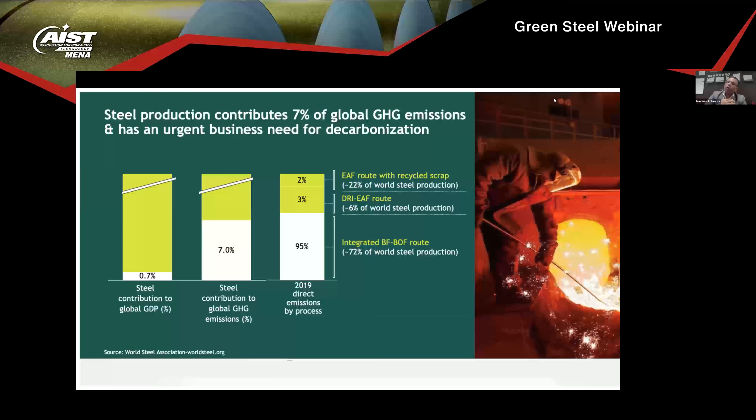Forget about leaving a better legacy for our future generation or having an impact on climate change; it will also have an impact on the GDP. The country will definitely lag behind if we do not take action. The iron and steel sector contributes close to 0.7% of global GDP, and its emissions are almost 10 times that. So it is absolutely imperative that we start working on the decarbonization of this sector.

If you see the different routes of iron and steel making, 70% is produced by the BF-BOF route, 6% is DRI electric arc furnace, and the remaining 22% is from the electric arc furnace with recycled scrap. Of the total emissions of 7%, 95% comes from the BF route, and 3 and 2% from DRI electric arc furnace and electric arc furnace. So this 95% is the lead domino where we have to deploy different options to reduce the intensity.

Now, if you see this, from the existing processes to the new process, it is very important to understand what are the quick wins, right? What are the easy movers, or what we say the shifters that we have, that we can quickly turn around. And for that, circularity, efficiency, renewable power, deployment of renewables, they are like the quick wins. We can immediately deploy and try to see the reduction.

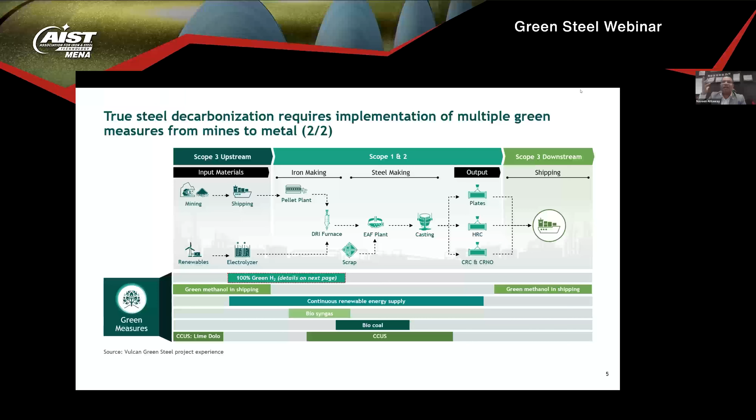Biocoal and biochar can also be interesting options along with biosyngas, where we can remove the anthracite coal or pet coke and start using biocoal and biochar. CCUS, we have already spoken on that. On the upstream and downstream logistics side, we can start exploring blue slash green methanol. Green methanol is again on the shipping side. If you talk to the maritime players, they are quite bullish on blue methanol at this point of time, and they believe that in the medium term, up to 2030, by the end of the decade, blue methanol is definitely an area they are bullish on, and they have started ordering.

Some of the companies like Maersk, they have ordered close to 25 odd ships which are going to run on the blue methanol. And then I think once we have the engines which can basically run on the dual mode, then we can shift it to the green ammonia side, when the delivered cost of green ammonia will fall somewhere around $600-700 per ton, which at this point of time is close to $1,000 to $1,100 per ton.

Now, hydrogen, as I said, it is definitely a silver bullet. So if you talk about the hydrogen and the complexity that we need to address, all these issues are being addressed side by side. It is not that they are challenges, they will remain the challenges. We are also parallelly solving the issues one by one.

So starting with power generation, I think we need to reach a sweet spot of solar and wind in case of a hybrid thing. We have to also consider the wake losses that we are going to incur for the wind turbine. So we have to find out a sweet spot of how much solar, how much wind, how much long duration energy storage, because solar and wind can only take us to 14-15 hours. The remaining 10 to 11 hours, we need to find out the solution for that, be it CO2 air battery storage, be it the molten salts, be it on the battery side, and exploring the more future ready technology like iron air batteries.

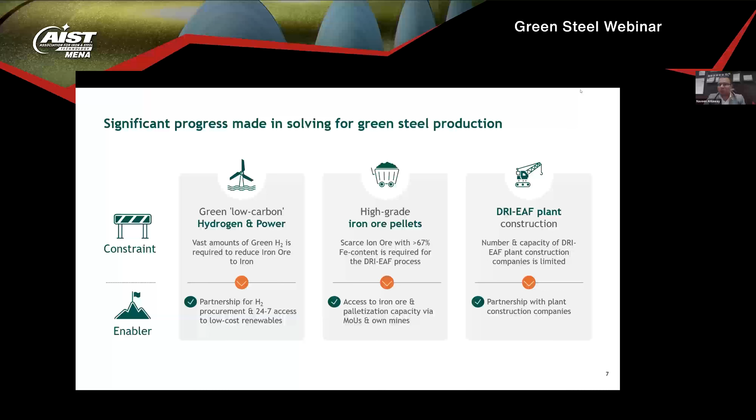So definitely the partnership can play an important role here. The high grade pellets, I think speakers have spoken about it. It is absolutely paramount. We need iron ore grade pellets having more than 67% iron content, and the DRI electric arc furnace. As we move forward, right now the current split, if you see, it is only 6% DRI-based electric arc furnace. By 2030 it will go to at least 12%, by 2035 close to 15 to 16%, and by 2040 it will hit close to 22%.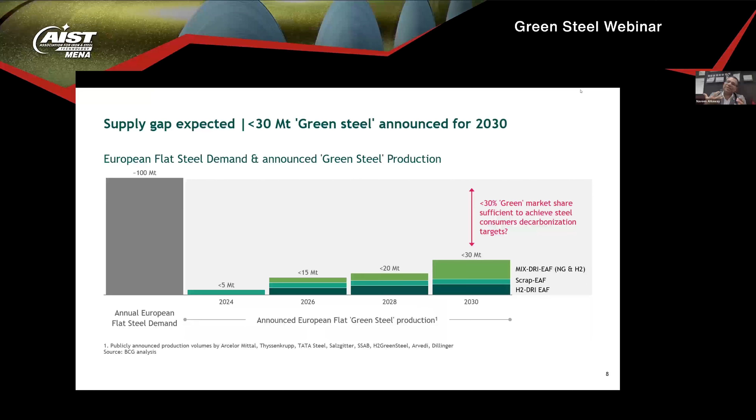So selection of the right technology between Energiron and Midrex is absolutely important. Having the right set of EPC contractors, super critical. Having the right set of engineers, the pool of talented subject matter experts, that is super critical. So we have to pay attention to this aspect as well, because in the complexity, sometimes we sort of lose our focus on these small soft non-technical issues.

So this is the motivation that we have. I think we all are aspiring for, by 2030, close to 100 odd million tons of green steel demand coming from Europe. If we take the most pessimistic scenario, 50 odd million tons is going to be the demand, and we do all the capacity addition by all the announced integrated steel producers in Europe, by Salzgitter, SSAB, and H2 Green Steel. All these guys, we personally believe that they won't be able to go beyond 10 to 12 million tons, right? So there is an upside of close to 35 to 40 odd million tons of steel, and that will come from Asia or from the Middle East.

So this is actually the opportunity that we all are aspiring to, and it is a good opportunity. So along with reduction in the carbon intensity, this green steel also presents a very good business case. I think this is another motivation: the final consumer, like you and me, buying a 30,000, 40,000 euro car, the incremental capex or the money that will go from our pocket if we have to source our appliances like a washing machine or car from green steel or low carbon emission steel, it is not more than 1%. So I think it is also another motivation.

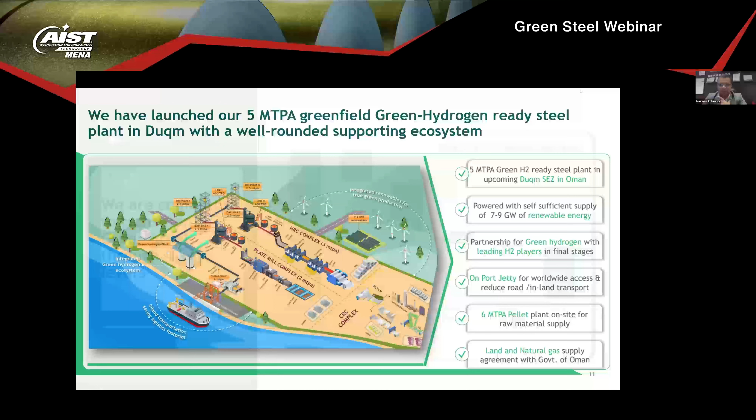There are a lot of studies done to gauge the interest from the final consumers, and one of the interesting case studies was done by Boston Consulting Group. During COVID time, they asked the consumers how much premium they are willing to pay, or are you willing to pay the premium? Only 10% of the final consumers said that they are willing to pay the premium. The same study was done last year, and a whopping 70% of the consumers said that yes, in order to really make an impact on the environment, and to leave a better legacy for our future generation, we are willing to pay the premium.

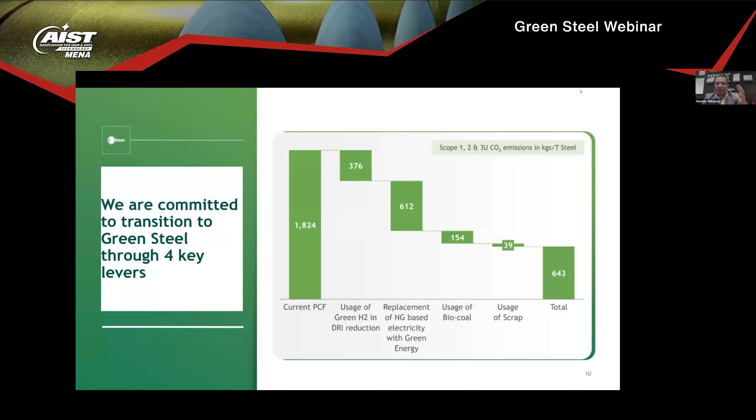So this is the change in the perception over the years, because all these climate changes are happening across the world. They are not saying that there's any boundary. Across the globe it is happening, and that's why it is actually having an impact, and it is impacting the overall consumers to really change their stance on this.

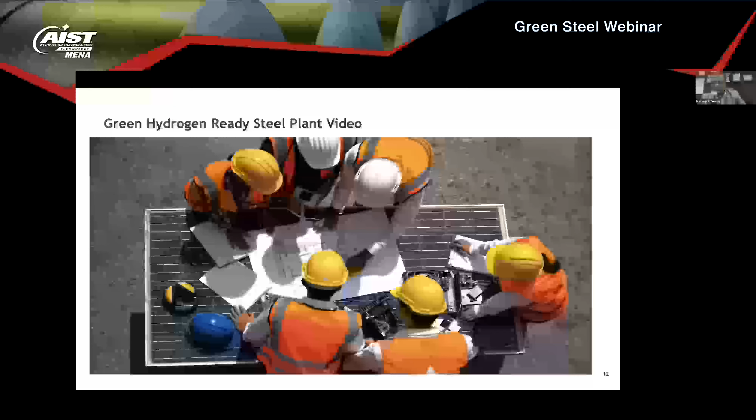This is actually our 5 million ton green steel plant that we are busy putting up in Duqm. 2.5 million tons, two batteries. The first battery will be commissioned by FY 26-27. The second battery, within an interval, in 27-28 will be commissioned. So we are in a very advanced stage of construction. We have placed the order for technology on Energiron. So we are quite excited about this project.

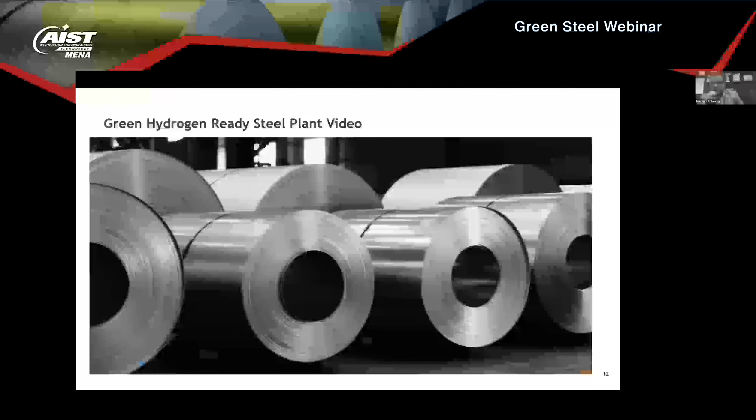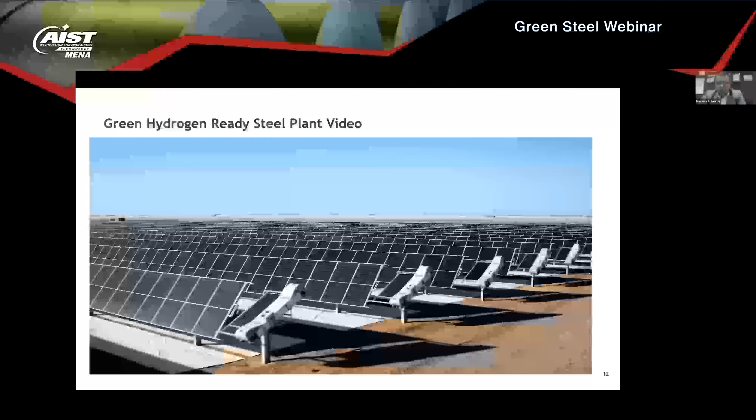And this is the goal. The goal is to reduce the carbon intensity from 1.8 to 600, so close to 75 to 80 odd percent, through these levers. Use of hydrogen, close to 400 odd kgs impact. 600 is through the use of renewable electricity, use of biocoal, use of scrap. All these levers are adding value, and you can see the impact that they have to reduce the carbon intensity from 1.8 to 600.

I want to just play a video. I know I'm running behind the time, but I think it will also motivate us to really push this decarbonization.

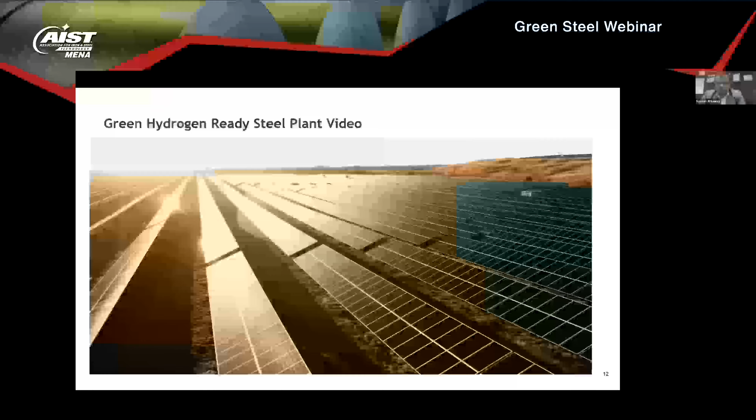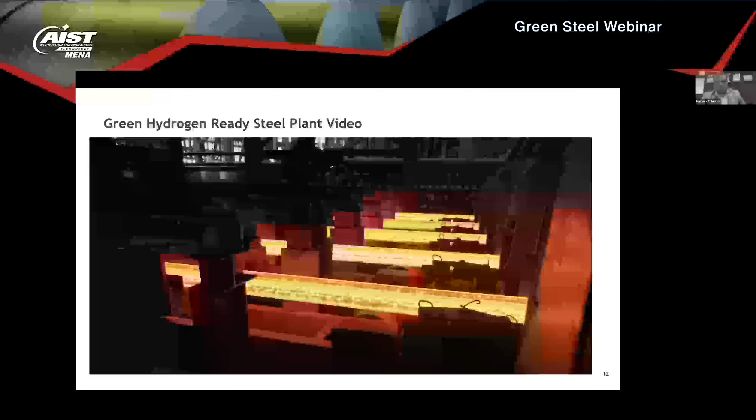Our climate is changing. We have understood that we need to act right now. And we are already changing the way we live our lives. Around the globe, industries explore new routes and strive for transformation. A transformation that can only be done with steel. Mobility, renewable energies, our private lives.

Steel is omnipresent. At Vulcan Green Steel, we are part of the Jindal Steel Group, and we have a vision. By 2030, to deliver green steel, with 85% less CO2 emissions than blast furnaces. Produced with renewable energy and with green hydrogen. A giant leap towards a reduced carbon footprint. We want to help our customers to make our future greener, better for all.

With Oman, we have found a strong partner who shares our vision, who supports our ambitious plans with a sustainable mindset like our own. Together with Oman, we are fostering innovation, industrialization, and sustainability, fully in line with the Oman Vision 2040. And Oman has more to offer.

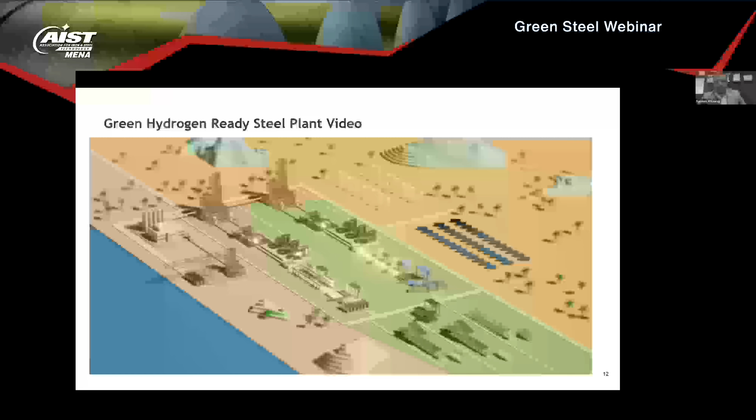A world-leading solar profile with 3,500 hours of sunshine every year, and a superb wind potential on a par with that of the world's best location for wind power. In short, ideal renewable energy conditions for the green steel production of tomorrow. Therefore, the inception of Vulcan Green Steel is a massive investment in the future and the region.

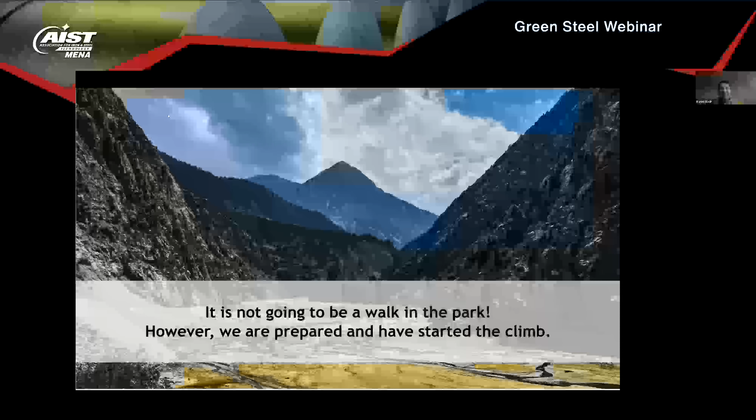In Duqm, we're currently building an integrated steel complex, the first of its kind in the GCC, and with direct access to its own jetty for a more sustainable supply chain. The Vulcan Green Steel Plant, producing 5 million tons of low-emission steel every year, powered with 100% renewable energy.

With our vertically integrated steel mills, we will produce green steel in Duqm for industries like automotive, wind power, and home appliances. The Vulcan Green Steel project in Duqm is the world's best bet to make green steel before the end of the decade. We strongly believe in this visionary project and in our partnership with Oman. That's why we commit to our green pledge today and for the future.

So last slide, thank you. I think it's not going to be a walk in the park, but I think we are prepared and we have already started the climb, and this is the only way how you can convert this hard to abate sector to the possible to abate sector. Thank you so much.

Thank you, Naveen. Very nice presentation. We liked it much. It gave us insight into what's going on also in Oman, and the video was very nice. We hope all the best for Oman. There's a lot of potential there in terms of green energy. This is a place that investors should always think of. Thank you once again, Naveen.

Appreciate it. Maybe you can just say something about when the startup is planned? As I said, the first battery of 2.5 million tons will be up and running by FY 26-27. We are going to start the battery with natural gas, and then we'll do the transitions. Our target is to do the complete transition by FY 31 for the first battery. The second battery will come up and running within an interval of 12 to 15 months. So FY 27-28 is what we are aiming for right now.